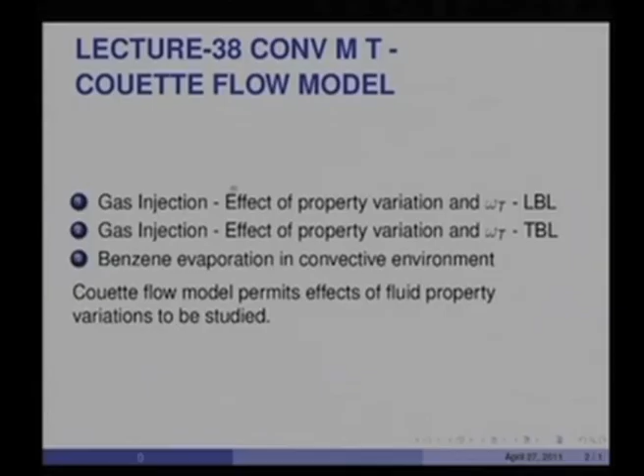So the main objective of applying the Couette flow model to convective mass transfer is really to study the effect of fluid property variations.

So let us consider the first case of a laminar Couette flow of air, as shown here. In Couette flow, as you know, the velocity profile is assumed linear, with velocity u infinity at a distance delta from the wall. There is a gas being injected here at the wall.

So consider a laminar Couette flow of air in which a gas with a specified omega gas T is injected. Develop the relationship G by G star as a function of B when the gas is either CO2, helium, or hydrogen.

Now why we have chosen these three gases is that the molecular weight of CO2 is 44, whereas the molecular weight of air is 29. The molecular weight of helium is 4 and that of hydrogen is 2. So we have gases whose molecular weight is both higher and lower than that of air. This will be a good case to see how these property variations affect G over G star.

So in the Couette flow model, all derivatives with respect to x are zero. The mass conservation equation gives d(rho u)/dx equal to 0, which implies d(rho v)/dy equal to 0, meaning rho v is constant with respect to y. Rho into v is constant with respect to y, and therefore N w, the mass flux at the wall, will be rho w v w equal to rho v equal to constant.

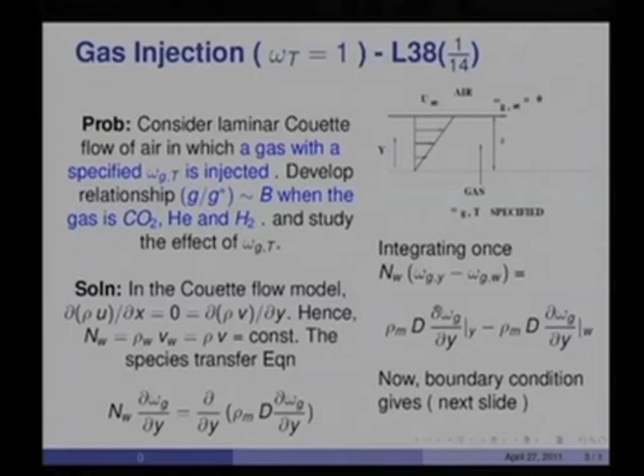Now, we will replace this from the boundary condition at the wall, and that is what is shown on the next slide. So, we know that n w is rho m d omega g d omega g by dy at w divided by omega g w minus omega g t, and therefore, that quantity is simply n w into omega g w minus omega g t.

So, if I substitute that in this expression here, then you will see I will get n w into omega g y minus omega g w equal to the gradient diffusion here at any y minus this quantity, which is n w into that denominator. So, you will see n omega g w gets cancelled on both sides, and therefore, I have rho m d d omega g by dy at any y equal to n w into omega g y minus omega g t.

Now, here d is constant. We assume that the diffusivity is not going to be a function of omega g. Also, the pressure and temperature are absolutely constant, and therefore this is a case of pure injection of a gas. There is no variation of temperature or pressure in the y direction, and therefore d will be constant.

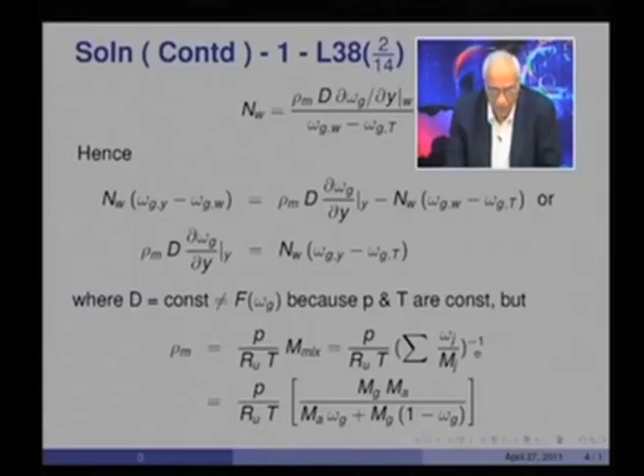But the density will be a function of the mass fractions, because rho m is equal to P by R u T into molecular weight of the mixture, and the molecular weight of the mixture is given by sum of omega j over m j raised to minus 1. Basically, what I am saying is m mix equals...

sigma omega j m j raised to minus 1, and therefore that will be equal to 1 over omega g divided by m g plus omega air divided by m air, and that would be nothing but omega g over m g plus 1 minus omega g over m a, which transforms to m a m g divided by m a omega g plus 1 minus omega g into m g.

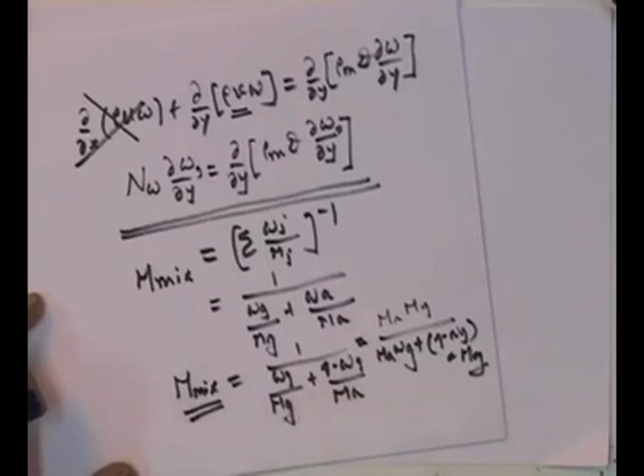So, that will be the mixture molecular weight, which will vary with omega g in this manner. P by R u T remains as it is, P and T are constant, and m a m g divided by m a omega g plus m g into 1 minus omega g.

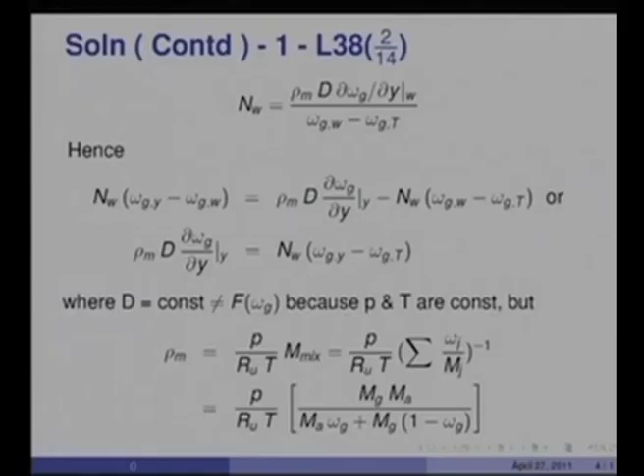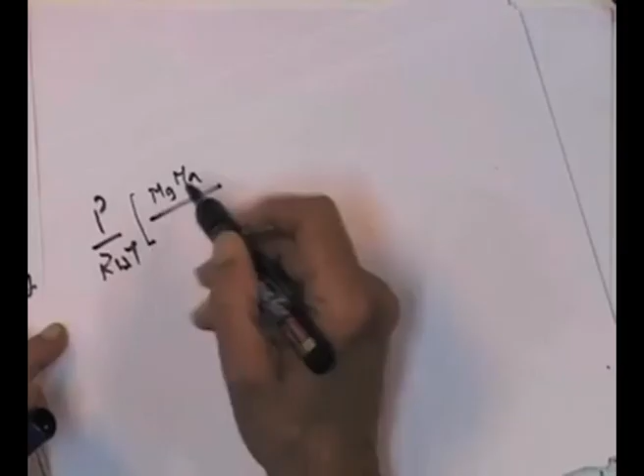So, should I substitute for this rho m here and then integrate, then you will see this is what would happen. Basically, you will see that what I have got here is m g m a divided by m a omega g plus m g into 1 minus omega g, into d omega g by dy.

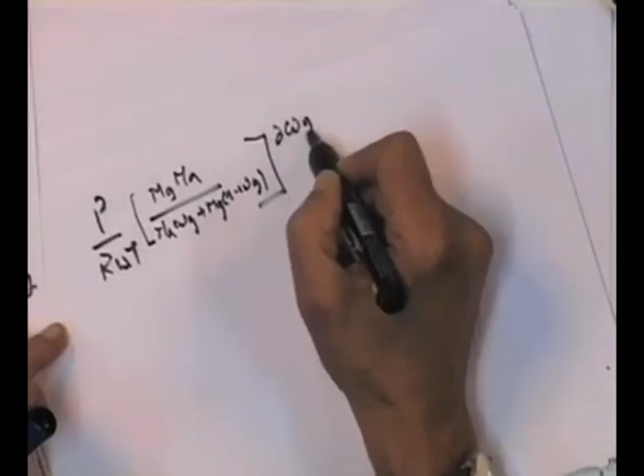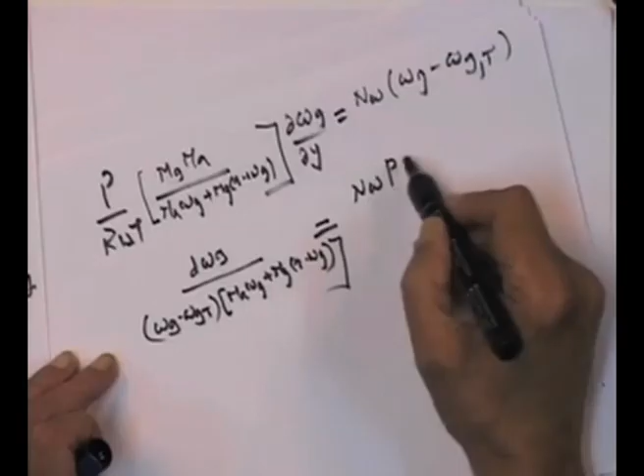equal to n w into omega g minus omega g t, and therefore, should I reorganize this equation, you will see I will get d omega g divided by omega g minus omega g t, into m a omega g plus m g into 1 minus omega g, equal to n w, P by R u T, into 1 over m g m a. So, that is what I have got.

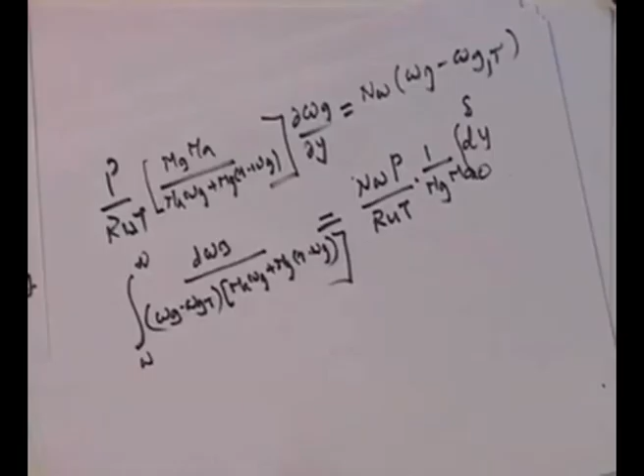Now, I am going to integrate this from the wall to the infinity state, and likewise this one from dy, the integration will go from 0 to delta, and this will then become n w P R u T delta divided by m g m a. So, that is what you will see on the slide here.

Now, the left hand side, which I have shown here in writing, this would transform to a quadratic like denominator: a times omega g square plus b times omega g plus c. That is what it will be, and that is what I have written here. So, you can see it will be n w R u T delta divided by P m g m a, and a omega g square plus b omega g plus c, where a is equal to m a minus m g, b is equal to m g minus omega g t, which is given, into m a minus m g, plus c is equal to minus m g omega g t.

So, the left hand side integration, which is from wall state to infinity state, and in the infinity state there is no gas, there is pure air, and therefore that is 0. The left hand side integrates to 1 over the square root of b squared minus 4 a c, times ln of 2 a omega g plus b minus the square root of b squared minus 4 a c, and likewise with plus sign, from omega g w to 0. Therefore, you get 1 over m g plus omega g t into m a minus m g, ln of 1 plus b plus omega g t into b, ma over mg, minus 1.

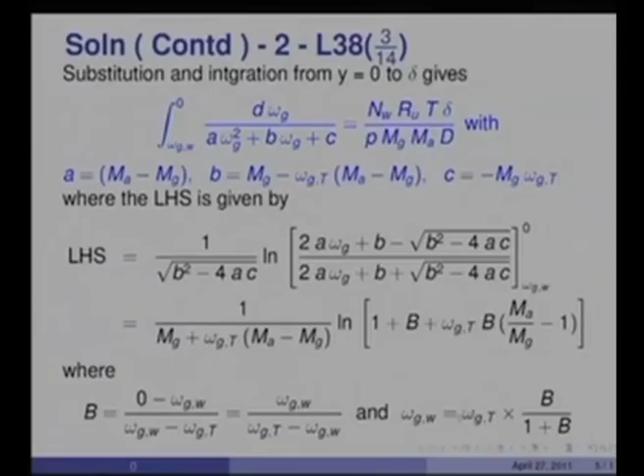From the Couette flow model, we know that N w is equal to G b, and I can replace R u t by P into m g, as simply 1 over rho g, well known. Therefore the right hand side will simply become G b delta divided by rho g m a d. The m g part goes out, R u t goes out, and P goes out, and d is the diffusion coefficient, which we said is constant.

If I now integrate the left hand side and right hand side, I can reformulate this as G delta divided by rho g into diffusivity is equal to m a by m g into ln of 1 plus b star over b star, where b star is given by b into 1 plus omega g t times m a by m g minus 1. There is a little algebra here, about 5 or 6 lines of rearrangement, and this is the modified driving force B star. If the properties were constant and we did not worry about molecular weight difference, then m a by m g would be 1 and this term would simply cancel out.

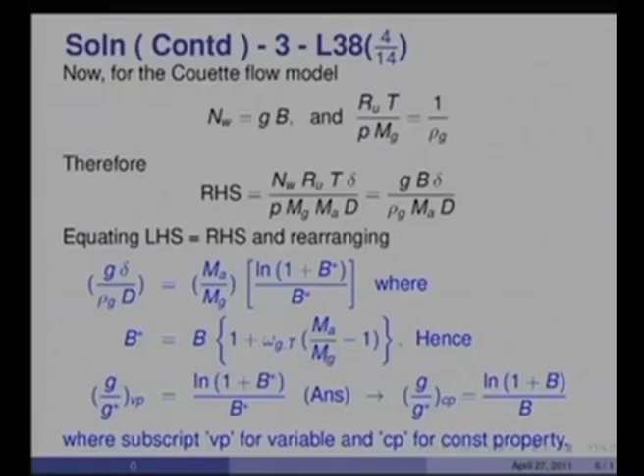But before we do that, let us look at the value of omega GT being very, very small. In this case B star almost equals B, because this is 0.01, a very, very small value, and therefore it will try to annihilate the effect of Ma by Mg to some extent, and that is what we will see here.

For example, for CO2, you will see that the constant property and variable property solutions are almost the same, very little difference. And so is the case with variable hydrogen and helium. So when omega GT is very, very small, apparently it does not matter whether we allow for variable properties or not. This is a very important deduction that we have got.

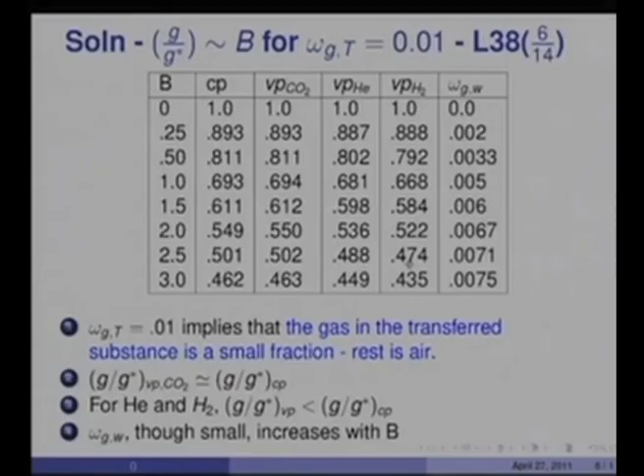Just a reminder that omega GT equal to 0.01 implies that the gas in the transferred substance is a very, very small fraction and the rest is air. So all are very close to what the constant property solution will be. So if you have a very weak concentration of the gas in the transferred substance, then constant property solutions are quite valid. Only when the transferred gas is the only substance being transferred do you have to worry about correcting property corrections.

I have replaced Ma and Mg in terms of M mix W and M mix infinity, and therefore G by G star Vp divided by G by G star Cp will be ln(1 plus B star) over B star, times B over ln(1 plus B). This clearly shows the influence of M mix W divided by M mix infinity on the value of G over G star Cp. B star over B would be given by that, and the rest is this.

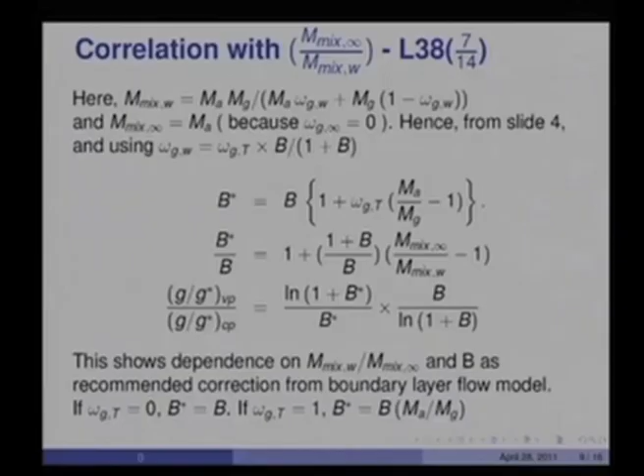So, in laminar boundary layers, we have shown that the ratio is indeed important. What about turbulent Couette flow?

In the turbulent Couette flow, the scalar transport equation will be N W, omega G minus omega G T, equal to rho m into effective diffusivity into d omega G by dy, where rho m into d turbulent would be rho m into nu T ref by Schmidt number. In the turbulent case, this is the effective turbulent Schmidt number.

But now, from Van Driest model, what will be nu T reference? Nu T will be mu T by ref into Lm square, equal to Lm square into du by dy, and in our case du by dy is a constant, because we are using a Couette flow model.

This would be the case where the first expression is for when y plus is less than 26. The second expression, where the mixing length becomes constant with respect to y, is for y plus greater than 26.

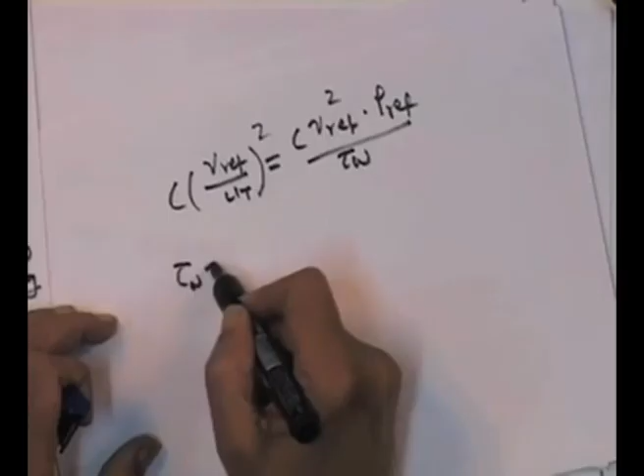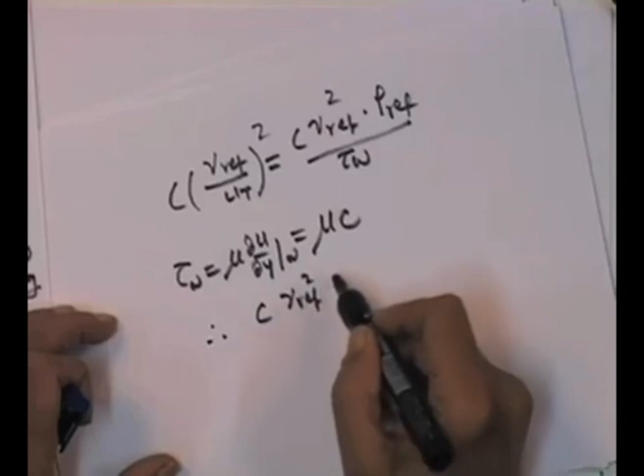But that is equal to mu times c, and therefore you will see c times nu ref squared rho ref divided by mu ref divided by c. So c and c gets cancelled, mu ref and rho ref gets cancelled with one nu ref, and that will be equal to nu ref itself.

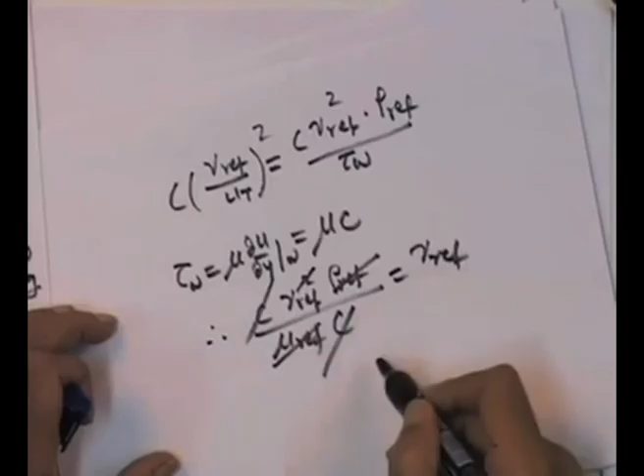So that is what I have shown here at the bottom of the slide, that this whole factor c nu ref whole squared by u tau is nothing but nu ref itself.

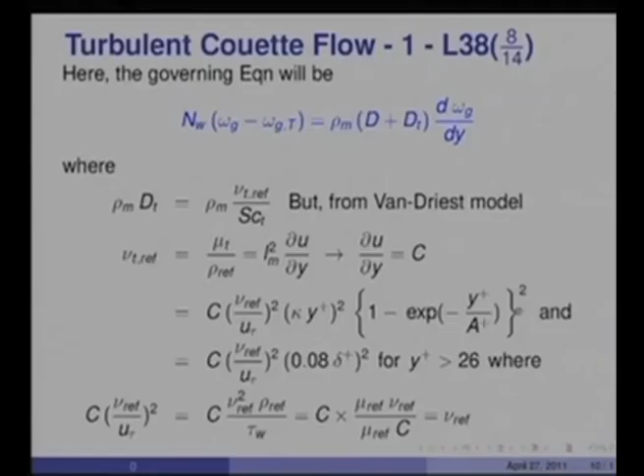So nu T ref, the turbulent viscosity divided by density, would be equal to the laminar viscosity divided by the density into these functions of y plus. For y plus greater than 26, it will simply be a constant.

And therefore, substituting for dt and rho m, which is a function of omega g and therefore omega y, we will have N W into omega g minus omega g t in this expression. I am now replacing dt.

I will have, and if I take rho m d common, then I will get 1 plus nu T ref divided by turbulent Schmidt number divided by diffusion coefficient into omega, d omega g by dy.

And if I were to substitute for nu T ref and also rho m, first of all I will get D p M a M g divided by R u T, u tau by nu ref, M a omega g plus M g into 1 minus omega g into f into d omega g by dy, and this big factor f is simply 1 plus Sc by Sc t kappa y plus square.

This is a little algebra that is easy to perform. So you will see that the f function will vary with y only for y plus less than 26, but would remain constant for y plus greater than 26.

So now, if I carry out the integration just as I did in the previous case, in which I bring omega g minus omega g t on this side and put it under d omega g by dy and integrate from 0 to delta plus, then you will see if I take N W equal to g b, then p M g by R u T equal to rho g again, and u tau equal to u infinity under root c f x by 2.

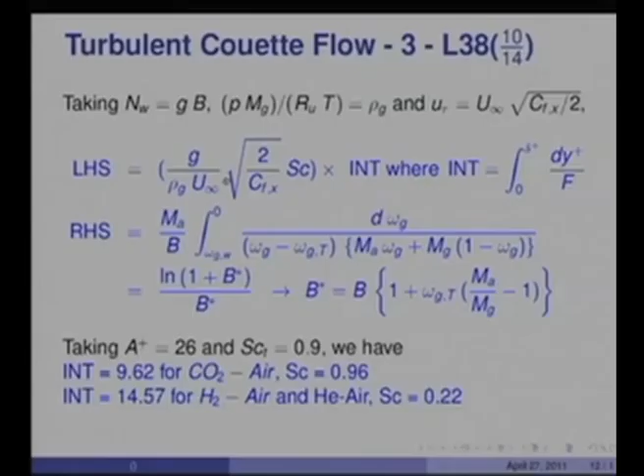As a result, we can show now that g v p divided by rho g u infinity, which is a kind of mass transfer Stanton number if you like, into under root 2 by c f x into Schmidt number, will be 1 over int into ln(1 + b*)/b*. Or I can say that g v p by g star variable property divided by g over g star constant property will again be equal to ln(1+b*)/b* into b.

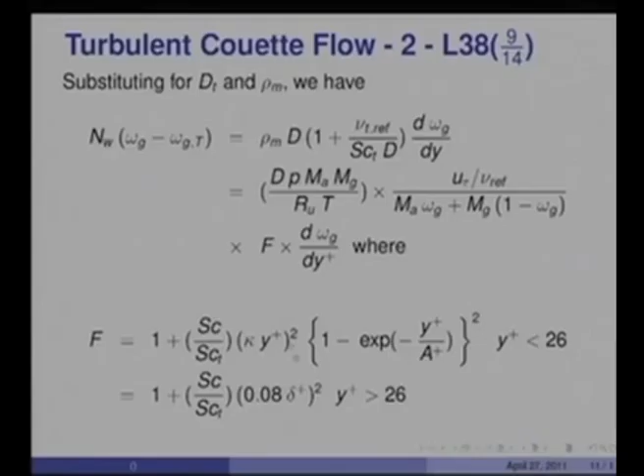So this result is again same as that for a laminar boundary layer. This is because it is assumed that the value of int is the same for both constant property and variable property conditions. This is an assumption we have been making, that the mixing length distributions are not influenced by whether there is mass transfer, whether there is property variation or there isn't any. The int factors remain the same both under variable and constant property conditions.

The int factors simply give you resistance to mass transfer due to turbulence. So noting that GVP is significantly influenced by the integrating factor, which is a function of Schmidt number, the actual value of G over G star Vp will be influenced by the Schmidt number.

We now take up a problem. Benzene evaporates from the outer surface of a circular cylinder. So let us say I have a circular cylinder like this, on which benzene has been put, and there is a cross flow across the cylinder, and therefore the benzene evaporates.

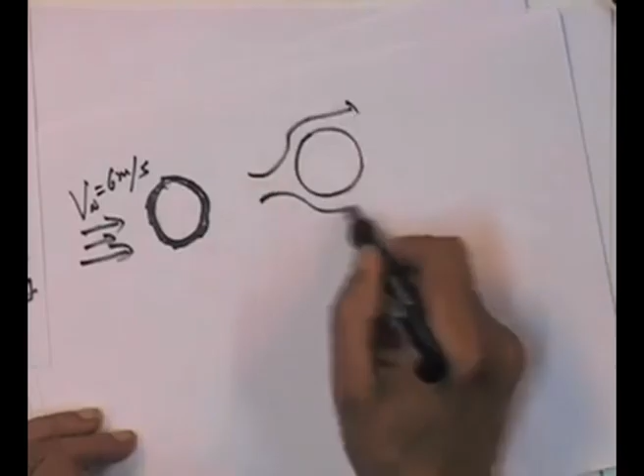The approach velocity V infinity is 6 meters per second. Now, from experiments for the same case of flow over the cylinder, heat transfer coefficient H coeff has been determined to be equal to 85 watts per meter square Kelvin, and this is when V W is equal to 0.

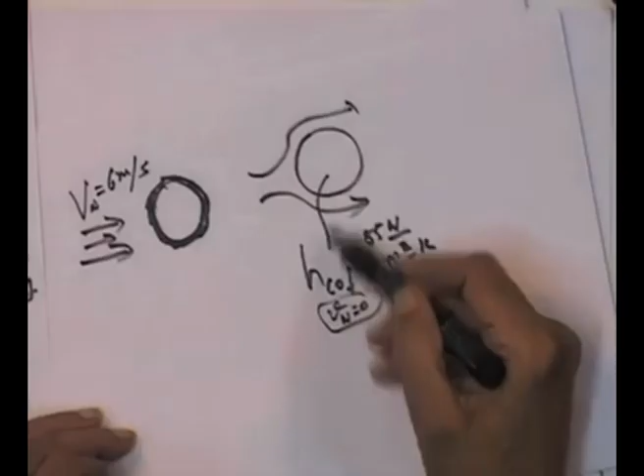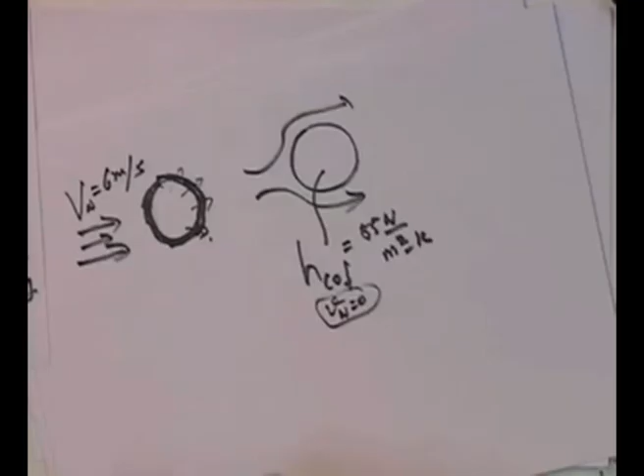That means there is no mass transfer from the wall, but in the present case, because of the evaporation, there will be mass transfer. But this experiment, being conducted without mass transfer, gave H coeff of 85 watts per meter square Kelvin, and here the B has been found to be 0.9.

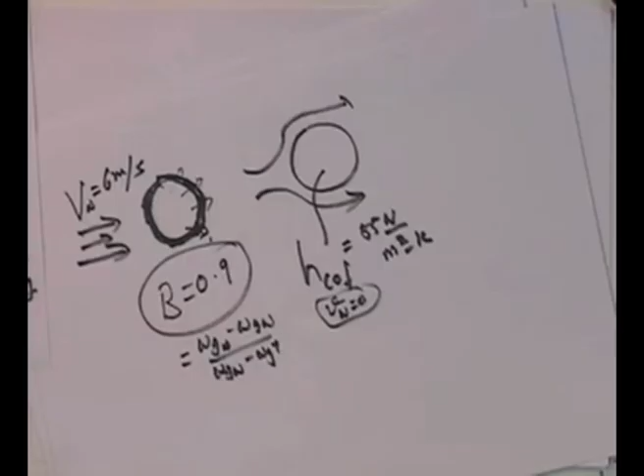That is, this is omega G infinity minus omega G W over omega G W minus omega G T, has been found to be, or in this case actually it is simply 1, is 0.9. So allowing for property variation, estimate N W and the value of omega W. Remember omega G infinity here is 0, and omega V W and omega G T being the only gas, that is equal to 0.9. That gives you omega V W equal to 0.4737 as the first answer.

That is what we want to get for omega W. Therefore, we take the mean concentration would be 0.2368, because remember omega G infinity is 0, and therefore CPM would be 1.69 times mean specific heat, that has been given to you, plus 1.01 into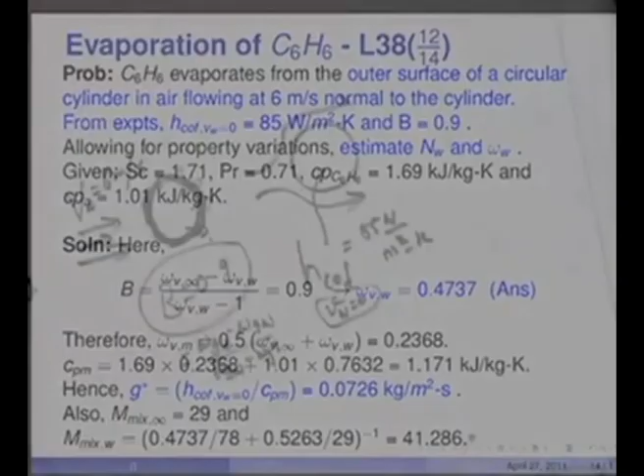0.7632, which is the specific heat of air, which gives you 1.171 kilojoules per kilogram Kelvin, and hence the G star for this case is h cof V W equal to 0 divided by CPM, which would be 0.0726 kg per meter square second. Now M mix infinity is 29, whereas M mix W will be

If we were to apply our

Reynolds flow model with property corrections, then you will see on this slide, G over G V p over G star over G star CP would be ln 1 plus B divided by B into Prandtl by Schmidt number raised to 0.37, because the Nusselt number for pure heat transfer without any suction or blowing

varies as Prandtl raised to 0.37, and this is the very well-known work of Zhukauskas, extensive work on flow over cylinders, with a variety of Prandtl numbers with and without property variations. The constant property solution correlation that Zhukauskas has developed is Nu Cp being proportional to Prandtl raised to 0.37, and therefore firstly we must allow for Prandtl and Schmidt number variations, which are 0.71 and 1.71 as we calculated, raised to 0.37, and then we must also allow for m mix infinity divided by m mix w, raised to minus 0.67. So you get ln 1 plus 0.9 divided by 0.9 into 0.71 divided by 1.71, raised to 0.37, and m mix infinity is 29, and this value we just calculated.

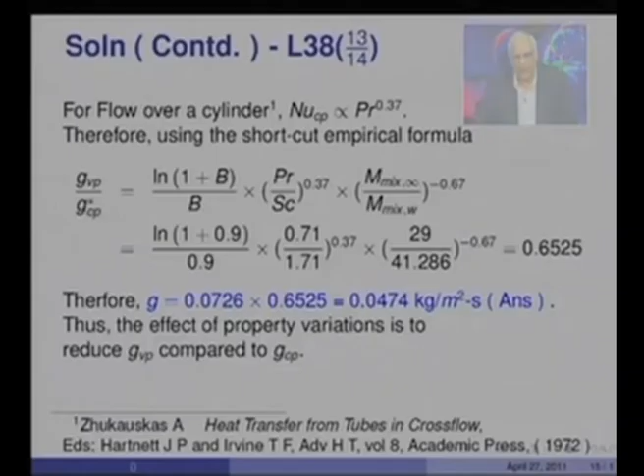Now let us see what Couette flow theory advises us, and that is the calculation I have done on the next slide. So if we followed the Couette flow theory, which as you know is an approximate theory, then in this case B star would be omega g t equal to 1, ma by mg as you know is 29, and for benzene the molecular weight is 78.

So you take 29 by 78 and put 1 here and calculate B star, then you get 0.3346, and therefore G over G star V p is ln 1 plus B star over B star, which is 0.8626. Now, under variable property conditions and with V w equal to 0, Zhukauskas says that h cof V p will be h cof C p into Prandtl raised to 0.25.

Therefore G V p would be G star Cp into 0.71 raised to 0.25 into 0.8626, equal to 0.0575. Now this value is not the same as 0.0474, but nonetheless this is greater than that, but it nonetheless shows you that our model is able to show that G V p will be smaller than G C p, which was only G star Cp, which is 0.0726 into ln 1 plus B by B.

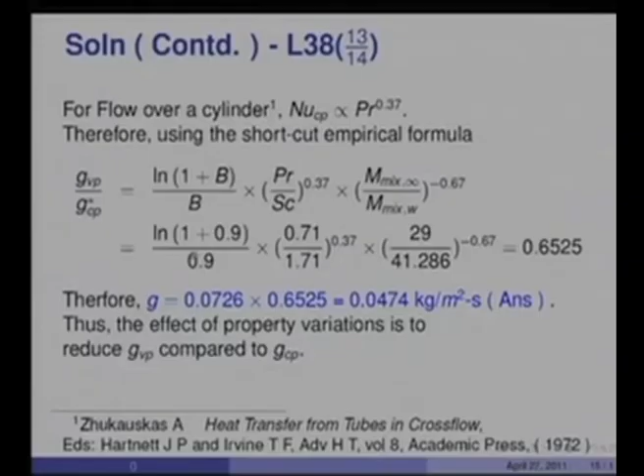Only that factor would have come in, and therefore our solution does show that Couette flow model predicts the correct trend, that G V p should be depressed compared to G C p. So that is precisely what this result also shows. To that extent, Couette flow model has justified the property correction recommended in the Reynolds flow model, which of course

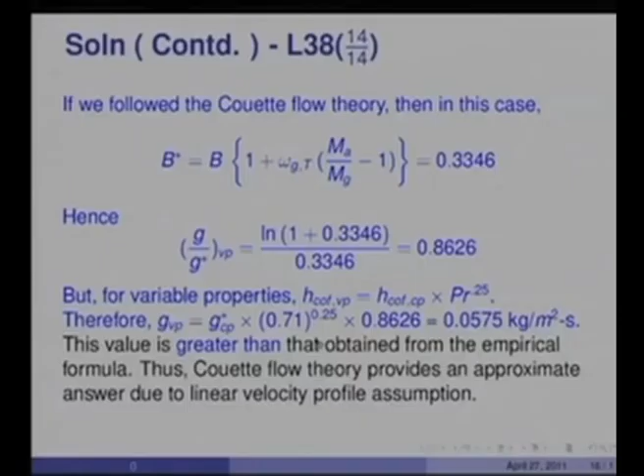was based on solution of the complete boundary layer equations under a variety of conditions, and therefore we do not expect the correction derived from Couette flow model to give us the same amount of reduction, but nonetheless it does show that there is a molecular weight effect, or the effect of property variation is definitely to depress the variable property value of G.

So with this I conclude the discussion of Couette flow. In the next two lectures, I will consider the application of the Reynolds flow model to various problems.